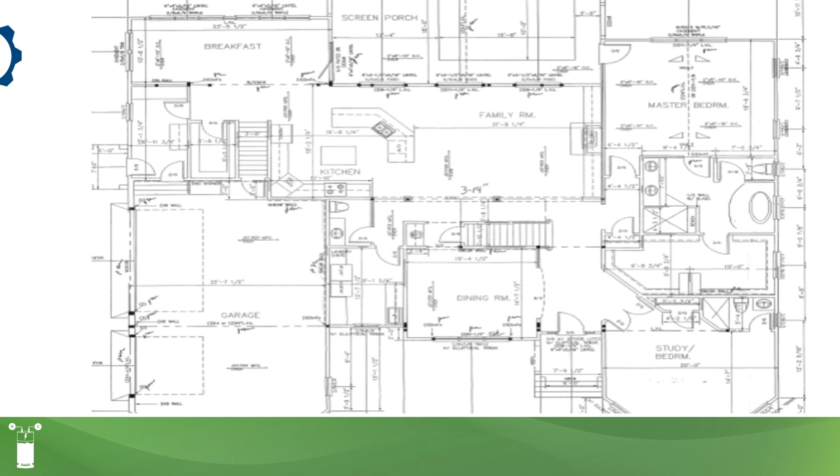So now we'll go through an activity of where you might potentially locate a heat pump water heater in a sample home. So there's a lot to look at in this image, and we'll explain a little bit of it. We're going to highlight the areas where potentially that heat pump water heater could be installed. We've got a garage, we've got a laundry room, and then we also have a closet, that big walk-in closet adjacent to the primary bedroom and bathroom.

Keep in mind that we have 2 bedrooms on the right side and that there are 2 full baths. Each one of those is located next to one of the bedrooms, and then there's a half bath near the kitchen. Given what you've learned in today's class, where would you recommend installing a heat pump water heater? And once you figure out a location, how big should that water heater be based on the size and calculations?

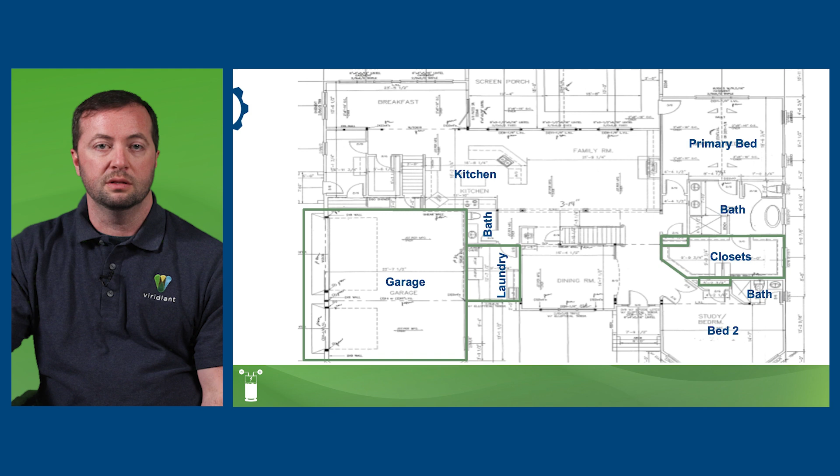And there is a slight trick, which is that you'll want to make sure that this table is showing the first hour rating, not gallons. So you'll need to then translate that first hour rating into a piece of equipment that can meet that. So Andrew, if you were tasked with installing a heat pump water heater in this home, where might you pick?

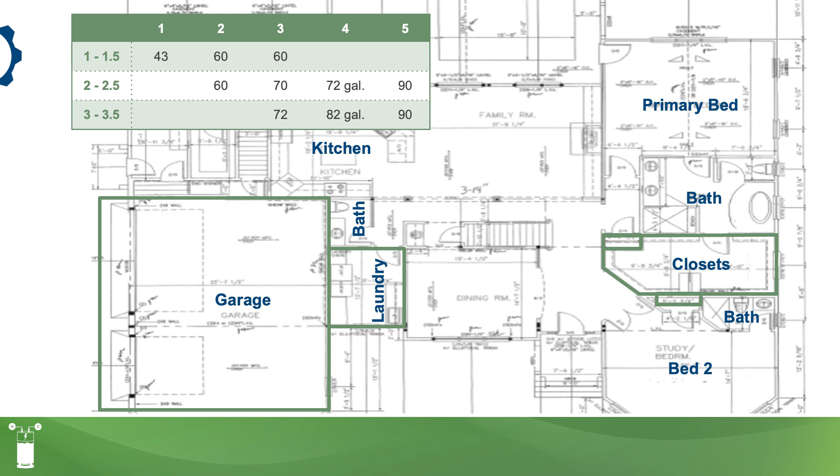Well, we've got 2 bedrooms, so we can use that column. It's showing either 60 or 60, and then showing 2 to 2.5 bathrooms. So we've got 2.5 baths here. So there we go, 60 gallons. Yep, and in terms of location, the garage is a great location in terms of not putting any cold air into the home. Heat is just going to be gathered from that garage space and the cold air will be expelled to that garage space.

Downside is it's sort of far from the 2 main bathrooms, the bathrooms that are attached to each of the bedrooms. So you may end up with some customer complaints about just the length of time to get hot water over to those spaces. The laundry room is definitely a contender because there are not any real living spaces adjacent to it. You've got a bathroom on one side, dining room on another side.

Noise isn't really going to bother anyone. That room being slightly colder isn't really going to bother anyone, and it'll be offset a little bit when somebody's running the dryer. So that's an option too. However, it's still sort of far from those bathrooms, but not quite as far as a garage.

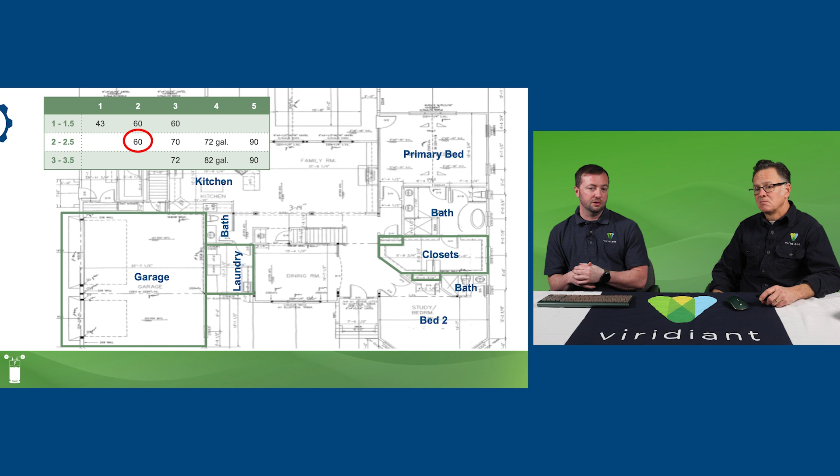And then the primary closet, for length of time to get hot water, it's perfect. It's right next to both of those bathrooms, but likely nobody is going to want to either give up closet space for that water heater or have to listen to the noise. Though the noise in that space would at least be buffered from the bedrooms by the bathrooms and the closets. So 3 potential options, each with their pluses and minuses.

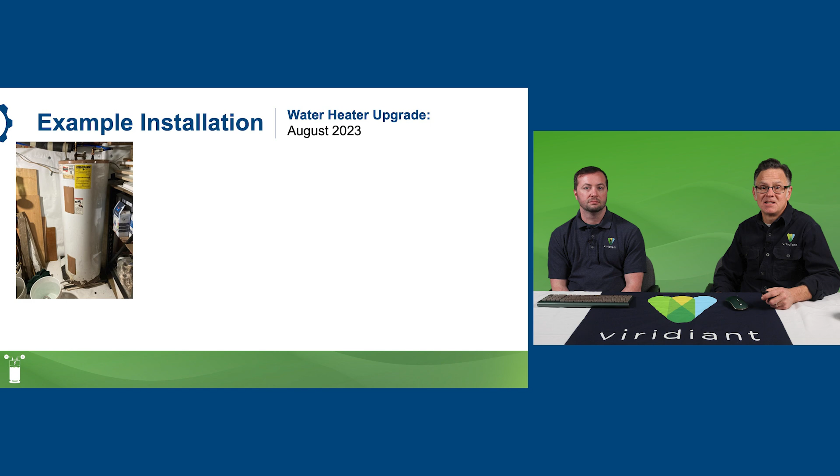Well, here is a real-world example that I'm very familiar with. This is my home. I put in a heat pump water heater back in August of '23, and you can see there the, well, not original, but the house is very old, but there was a working 1996 electric resistance water heater. Now, the retail price for that new water heater was $1,699, which qualified for the 30% federal tax credit. And I'm going to go through some of the details about this to really break through to the value proposition here.

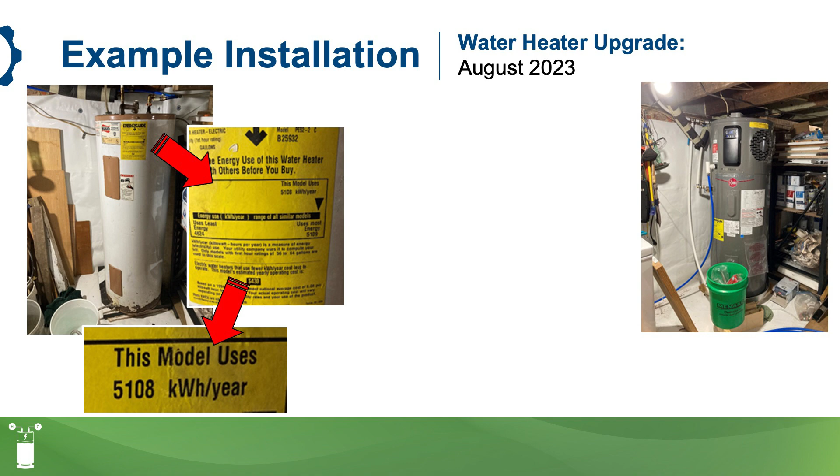So you can see there on the slide that that '96 tank still had the energy label on it, and it said on average you could expect it to use a little over 5,000 kilowatt hours per year. So here's the new heat pump water heater I put in. Now it's down in my basement, so I really think of that as an ideal location for it. It blows out cool, dry air. Hey, I was running a dehumidifier down there already to keep the moisture under control. So it's really kind of a perfect location. The modest noise and the cool air aren't a problem.

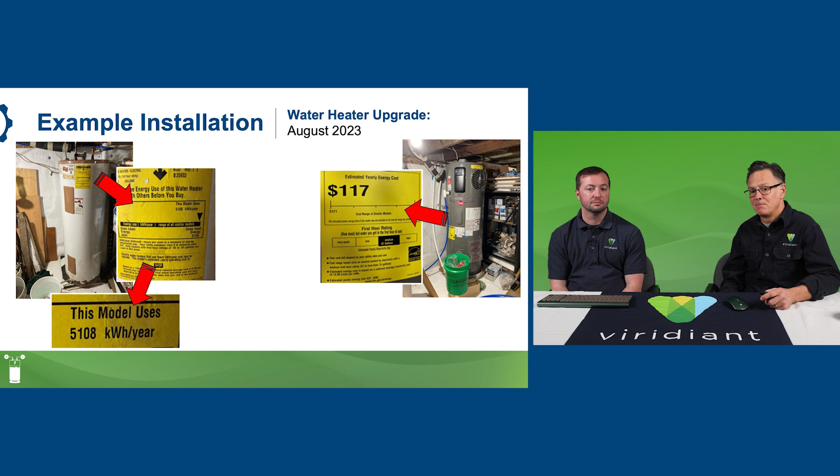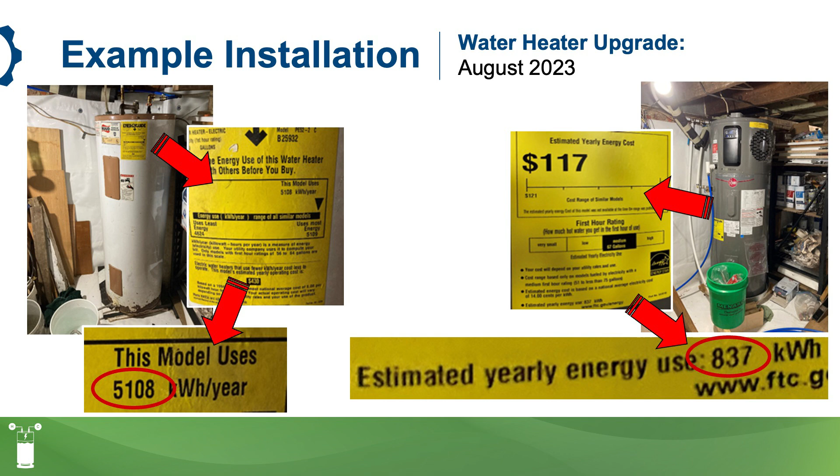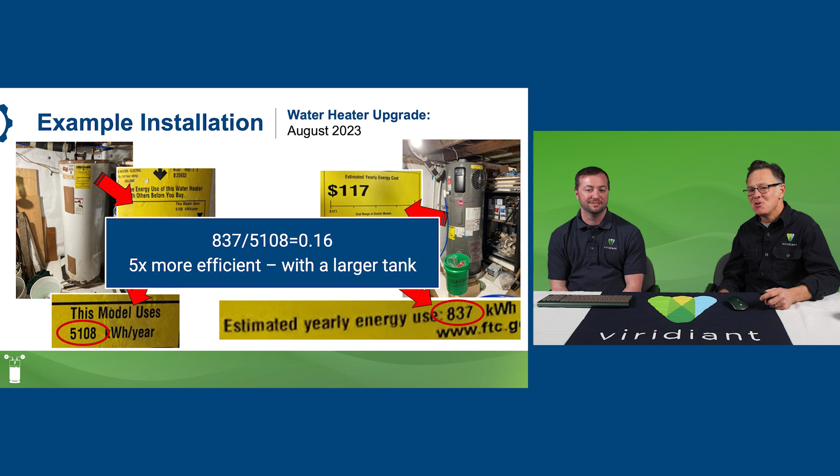And it's brand new, so it had an energy label. And here's the big difference here. A little over 800 kilowatt hours per year, again, compared to that 5,108. It's an impressive difference. It's fantastic. More than 5 times more efficient. Oh, and did I mention the tank is larger? So more hot water at a fraction of the cost.

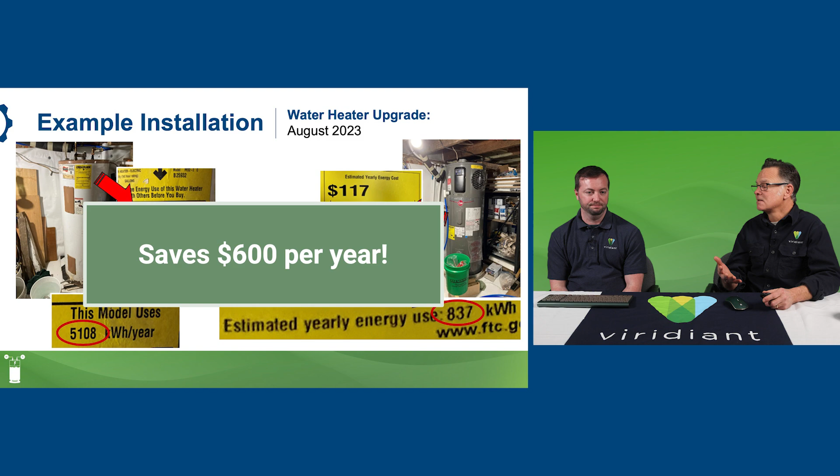And at our local then-current electricity rates, which have gone up since then, it's saving me over $600 a year. So yes, it costs more than 3 times for the device to install it. I'll earn that back in less than 3 years. So I consider this a really good investment. And it works great. I mean, it does the job. Again, it's a bigger tank.